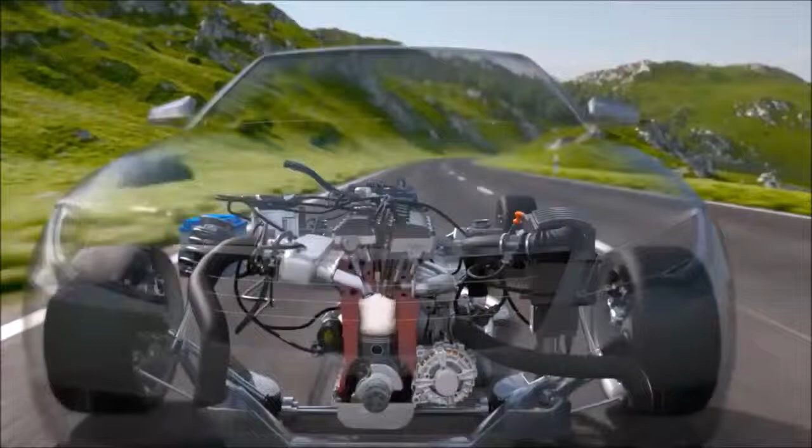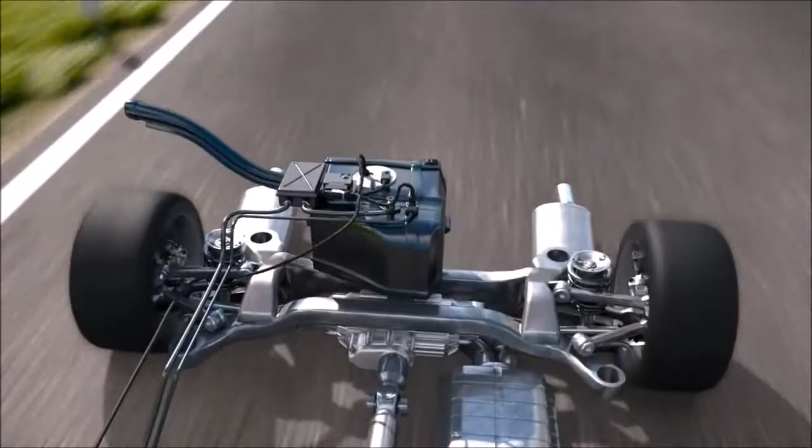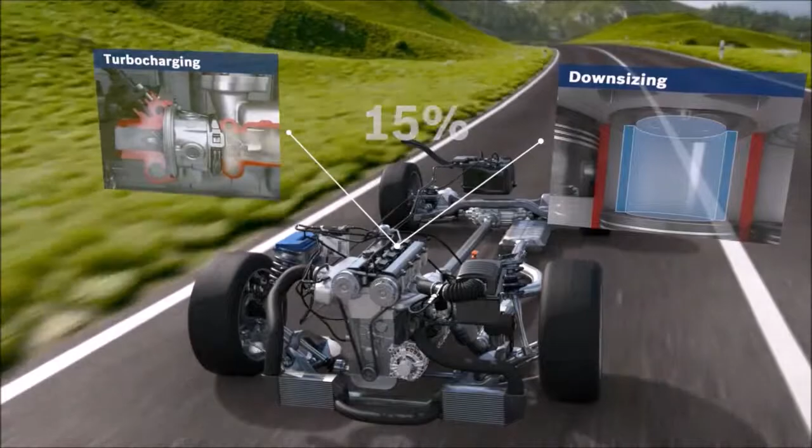...chamber. This results in higher compression, thus improving efficiency. Torque and driving dynamics are increased, while emissions levels are reduced. In combination with turbocharging and downsizing, gasoline direct injection offers the potential of lowering fuel consumption and CO2 output by around 15%. Additional optimizations can be made with functional features such as scavenging and CVO.

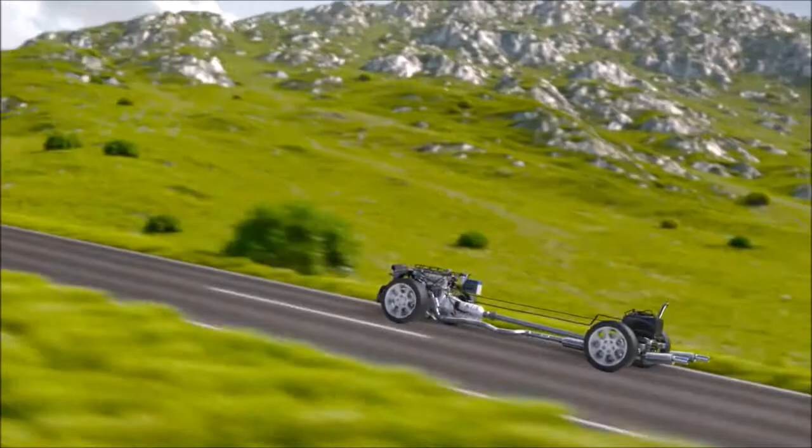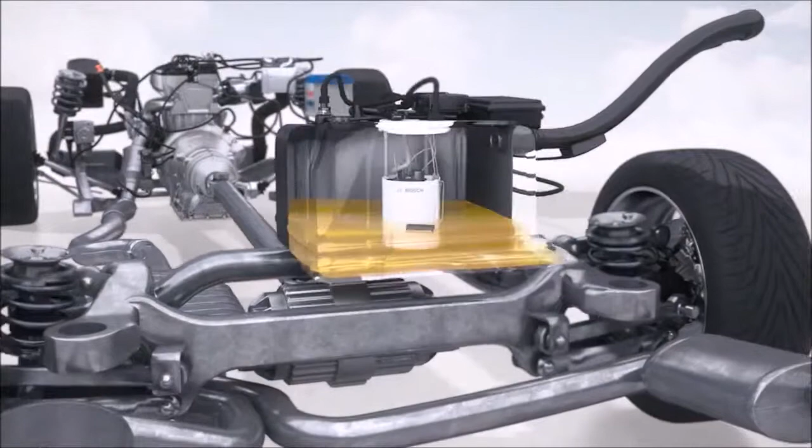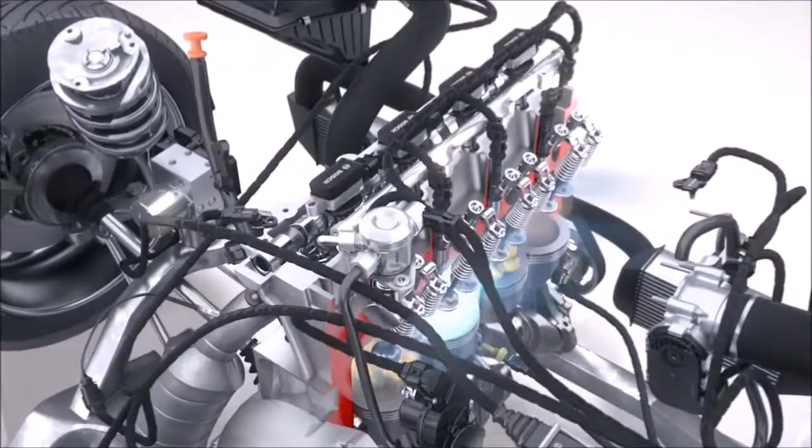The Bosch offering for gasoline direct injection comprises coordinated systems technology, as well as a comprehensive portfolio of individual components. To supply fuel, Bosch offers the fuel supply module with an electric fuel pump, fuel filter, and low-pressure sensor. These components provide the necessary amount of fuel, from the tank right up to the injection. The fuel is compressed by the high-pressure pump to the required pressure level of up to 200 bar and stored in the fuel rail. There, a high-pressure sensor measures the current pressure.

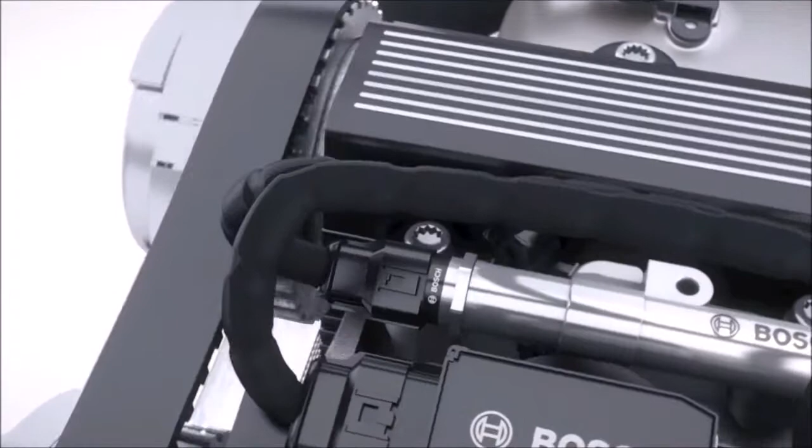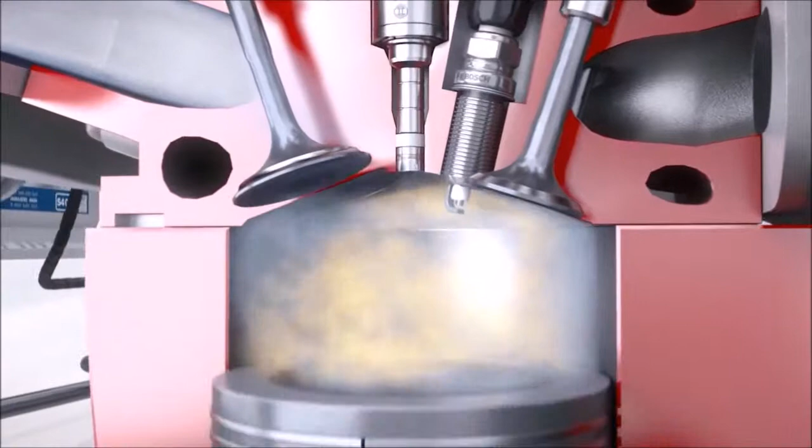Mounted on the fuel rail are high-pressure injectors that meter the fuel and spray it under high pressure right into the combustion chamber. Bosch injectors with innovative laser-drilled spray holes provide maximal flexibility in spray configuration while minimizing wall wetting in the combustion chamber. To achieve the best possible combustion, during gasoline direct injection, the air-fuel mixture is created right inside the combustion chamber.

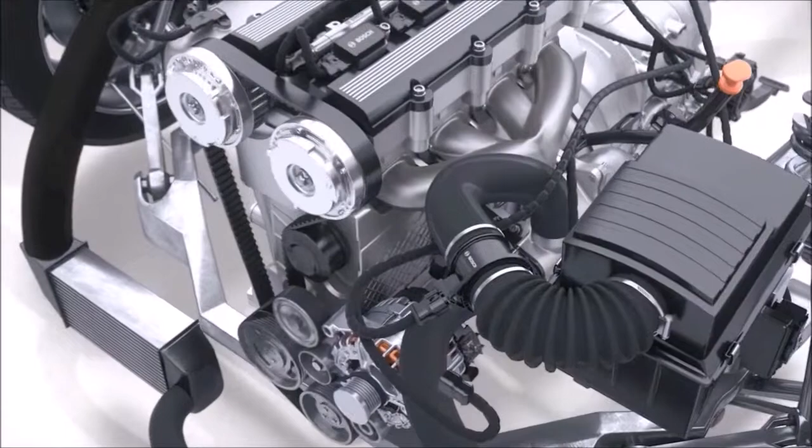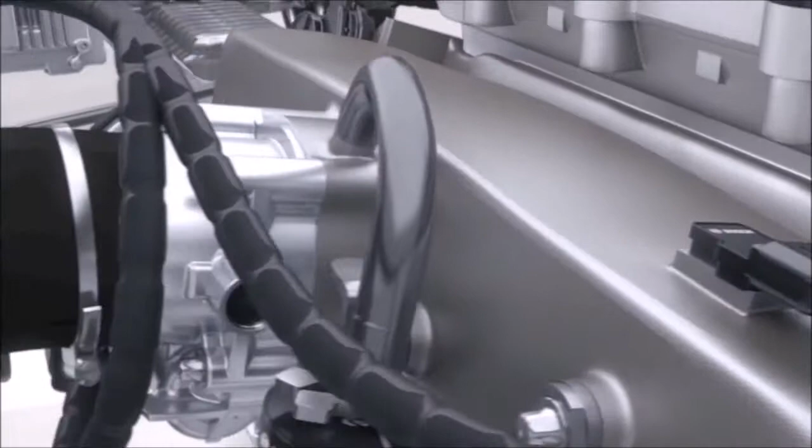The intake air control supplies the engine with the correct amount of air mass at every operating point. One input variable is the amount of air taken in, which is measured by the hot film air mass flow sensor. Further on, the intake manifold low-pressure sensor measures the air pressure. The throttle body controls the air supply to the engine cylinders by enlarging or reducing the diameter of the intake manifold.

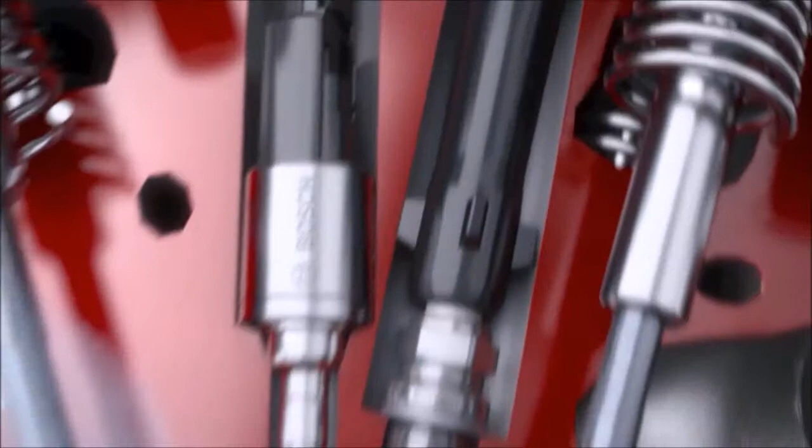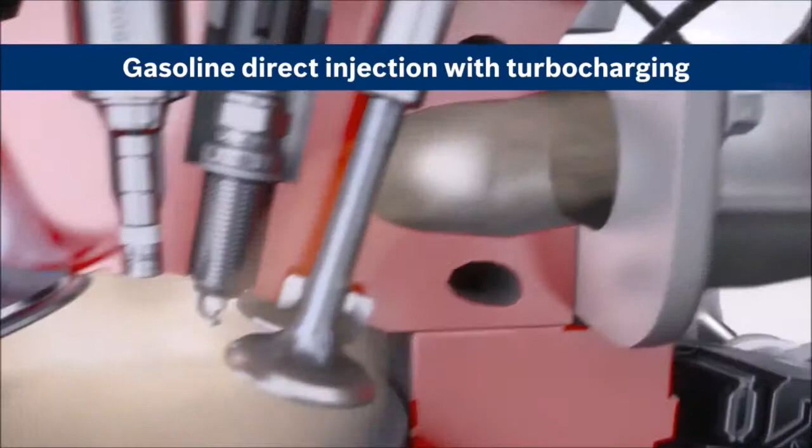The air-fuel mixture requires an ignition spark to combust within the engine cylinder. For this, the ignition coils generate a high voltage of around 30,000 volts, store it briefly, then transfer it as a high-voltage current impulse to the spark plug. Turbocharging enables a larger air mass to enter the combustion chamber. Thus, more air-fuel mixture is combusted, improving performance. The exhaust gas turbocharger uses the energy of the exhaust to compress the intake air.

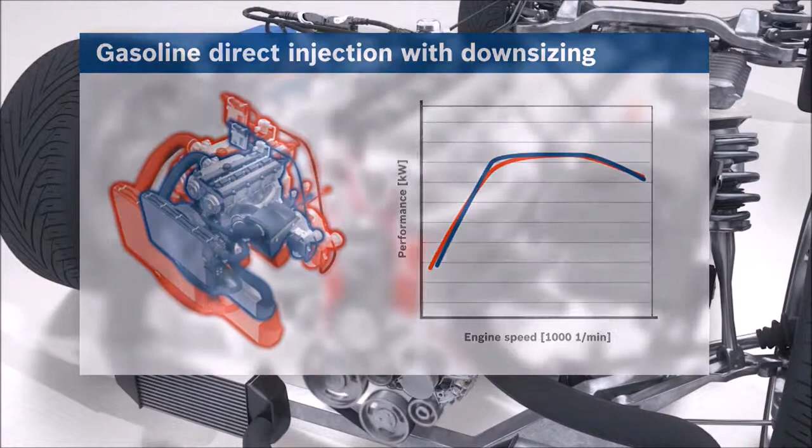With gasoline direct injection and exhaust gas turbocharger, engine displacement is reduced, enabling the implementation of downsizing concepts. The loss of engine performance resulting from reduced engine displacement is compensated by the turbocharging. Optimization of the individual operating points creates engines that deliver low fuel consumption and CO2 output with no loss of performance.

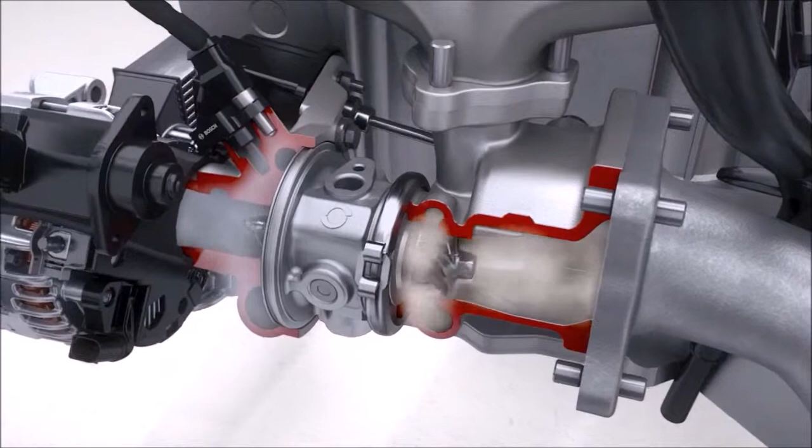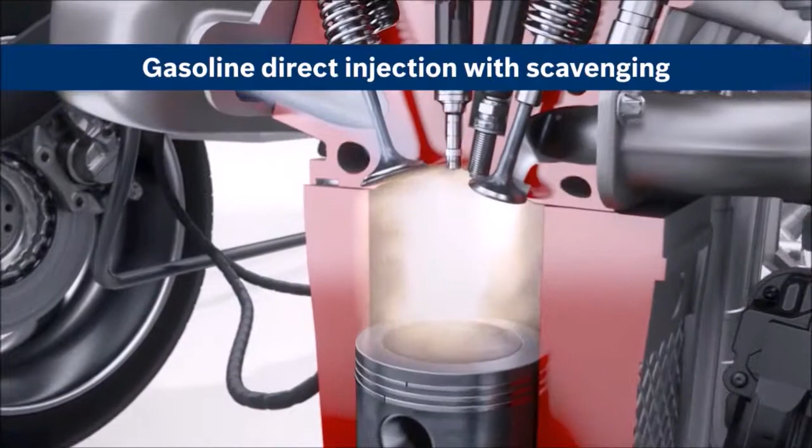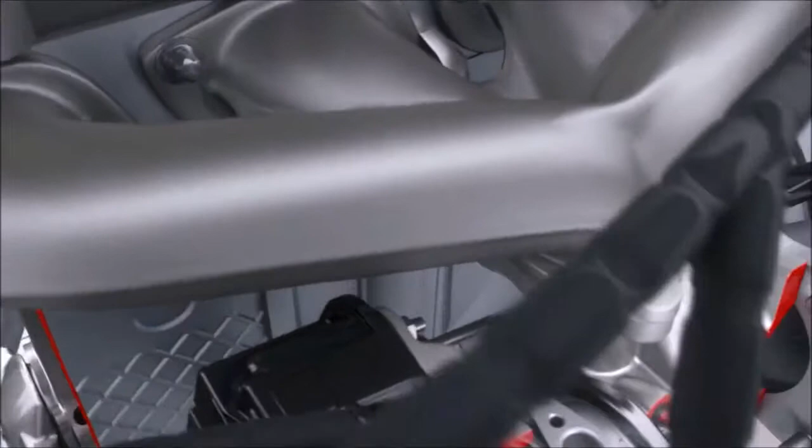Turbochargers require a certain minimum engine speed to attain their charge air pressure. If the speed is too low, a turbo lag occurs. Scavenging is the system innovation from Bosch that works to counteract turbo lag. To this end, the intake and exhaust valves are opened simultaneously for a moment. This creates a dynamic pressure differential between the intake and exhaust sides of the engine. Fresh air flows into the combustion chamber and flushes the exhaust gas from the cylinder through the open exhaust valve towards the exhaust manifold. The increased flow of exhaust gas creates 50% more torque at low engine speeds, counteracting turbo lag.

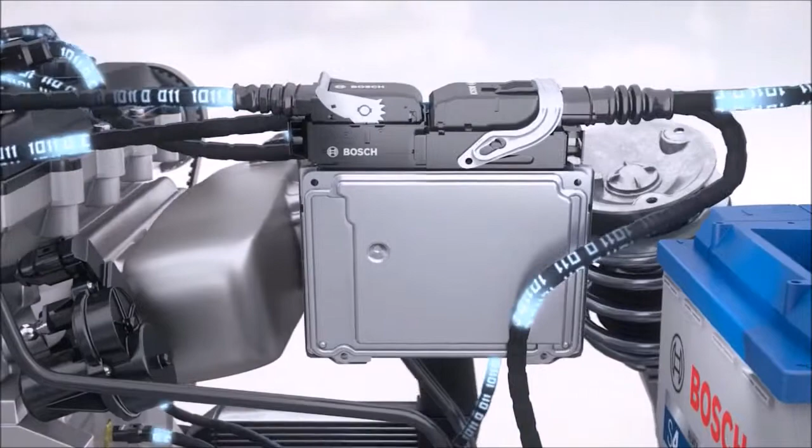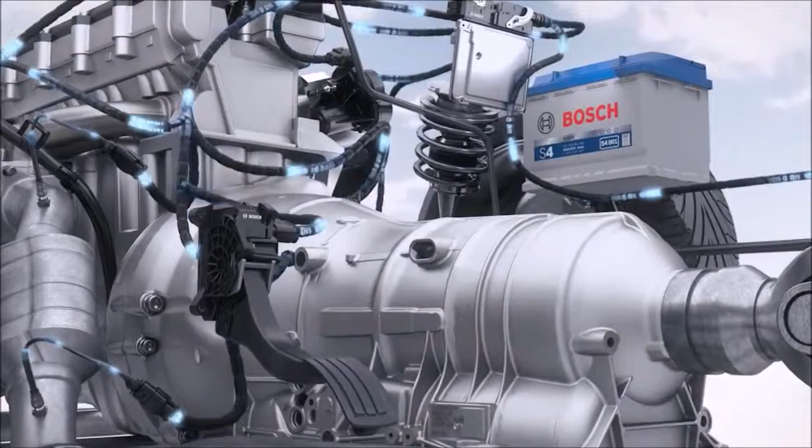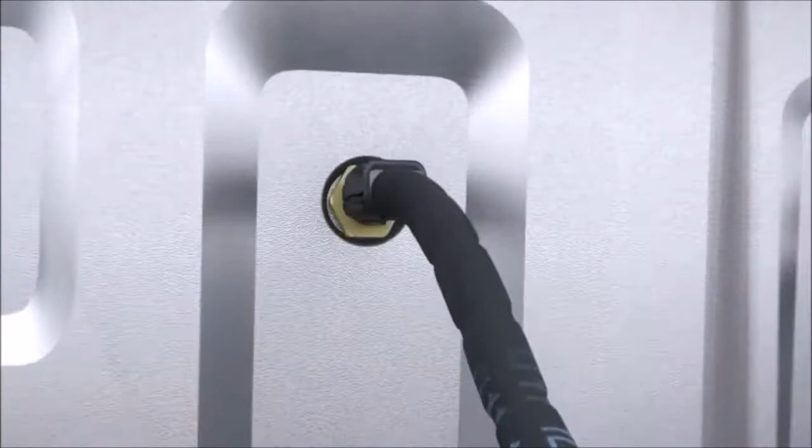Bosch Engine Control supplies the numerous functions that an efficient engine management system must provide. The driver's wish for more or less torque is an important input variable for the electronic control. The accelerator pedal module supplies the driver's wish as a sensor signal. The crankshaft sensor registers the speed and position of the crankshaft. Additional data is provided by the knock sensor, the temperature sensor, and the camshaft sensor.

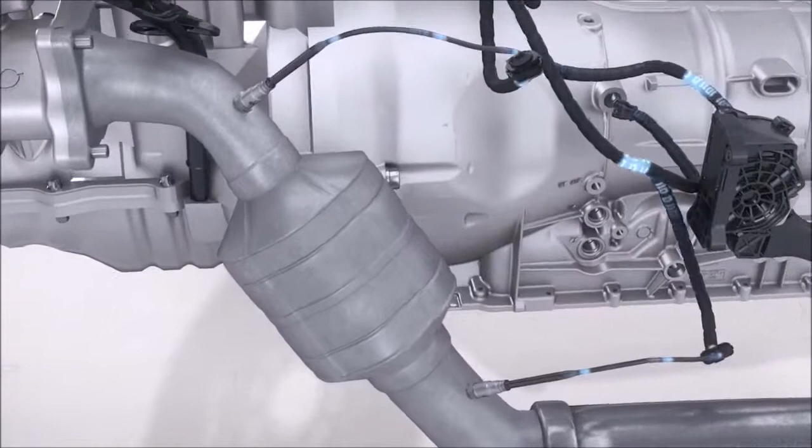Exhaust gas treatment from Bosch contributes to compliance with international emissions regulations. The planar wideband lambda sensor and the switching type sensor measure the oxygen content of the exhaust, thus providing the engine control unit with basic information for the correct mixture. Future legislation regarding particulate reduction presents new challenges for combustion engines.

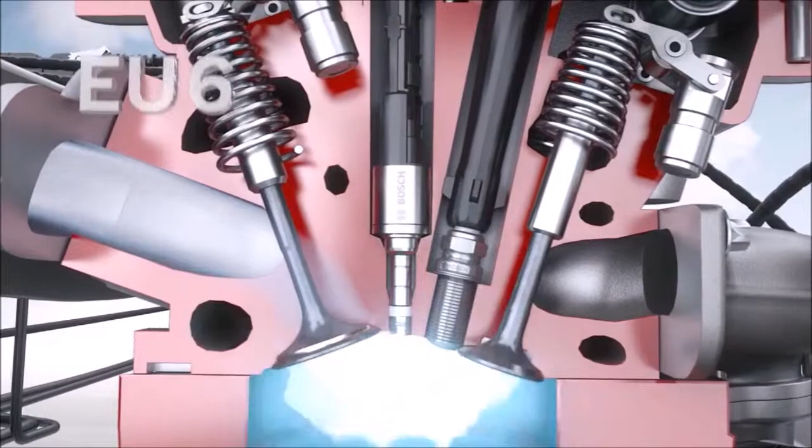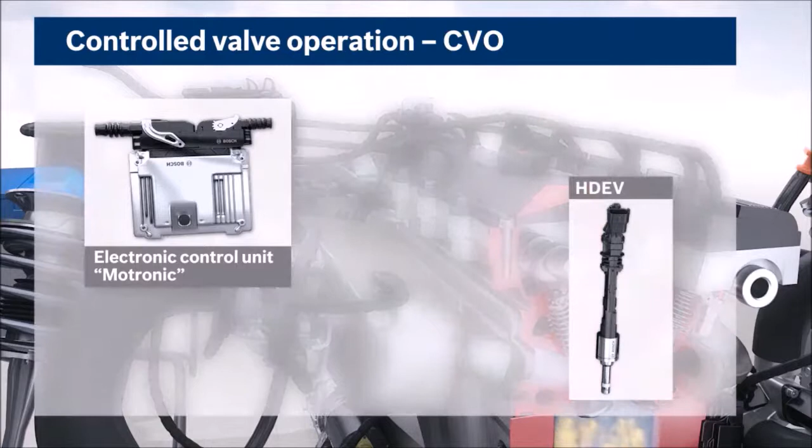With the unique and innovative System Solution Controlled Valve Operation, or CVO, for engines with gasoline direct injection, Bosch has successfully employed mechatronics to make a major contribution to achieving compliance with future statutory emissions limits, such as Euro 6 and SULEV. Key components of CVO are the Bosch engine control unit and the Bosch high-pressure injector. Contrary to the conventional pilot-controlled injection, the control unit and high-pressure injector operate in a closed-loop system.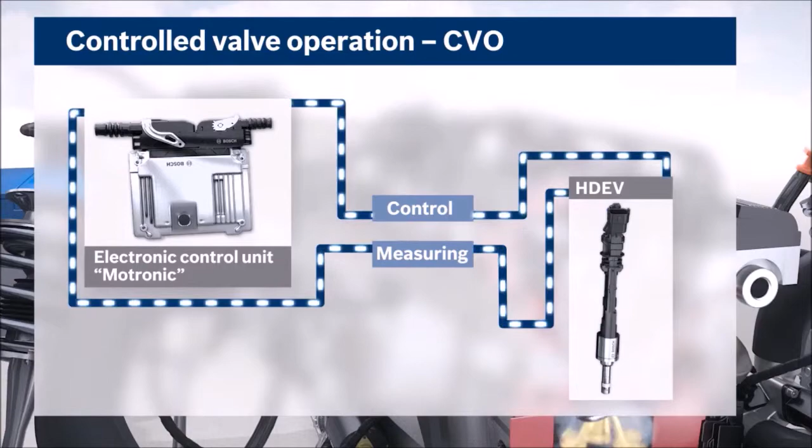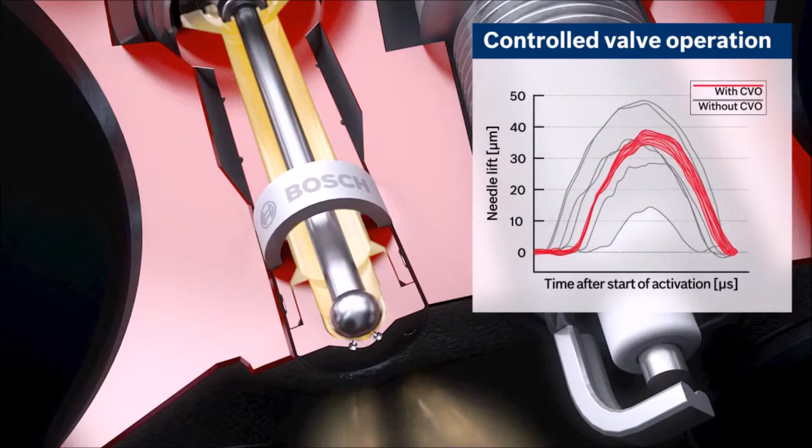During the injection, the control unit measures the activation signal and determines the opening and closing of the valve needle to compute the duration of the open phase. Thus, the electronic control unit can calculate the actual injection amounts of every injection and readjust if necessary. This type of closed-loop activation makes it possible to meter even the smallest injection amounts with minimal tolerances. The precision of the gasoline injection is thus significantly improved in this area and is maintained throughout the working life of the valve, guaranteeing a stable combustion procedure. Gasoline direct injection from Bosch is a key to...